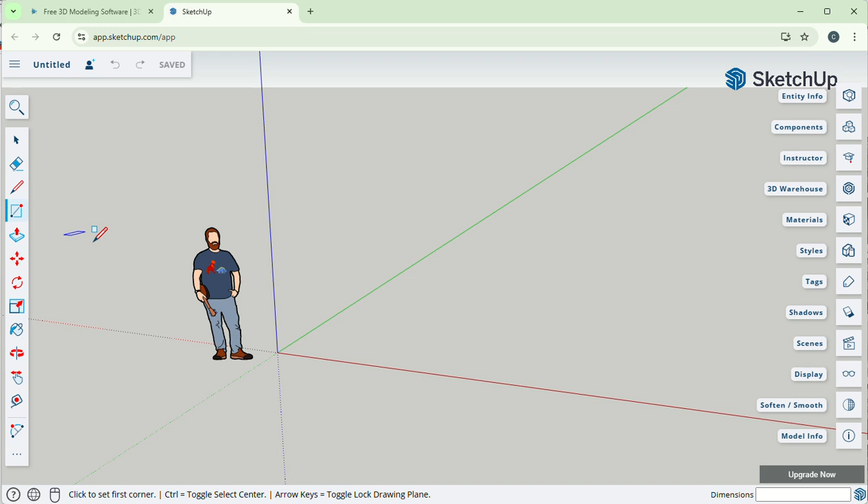First of all, I'm going to click this tool, which is rectangle. I'm going to where the axes meet, and I'm just clicking, click. My hands are now away from the laptop. I'm now going to the mouse pointer tool, the mouse keypad, and dragging it. And now I've just let go. And I'm going to click again to end the drawing.

So that is a basic rectangle, and it's on the floor, level with the man's feet. You can see I've still got the rectangle tool active, and now I'm going to click this, which is probably the most powerful of all the tools - push pull. This is what suddenly makes it become 3D.

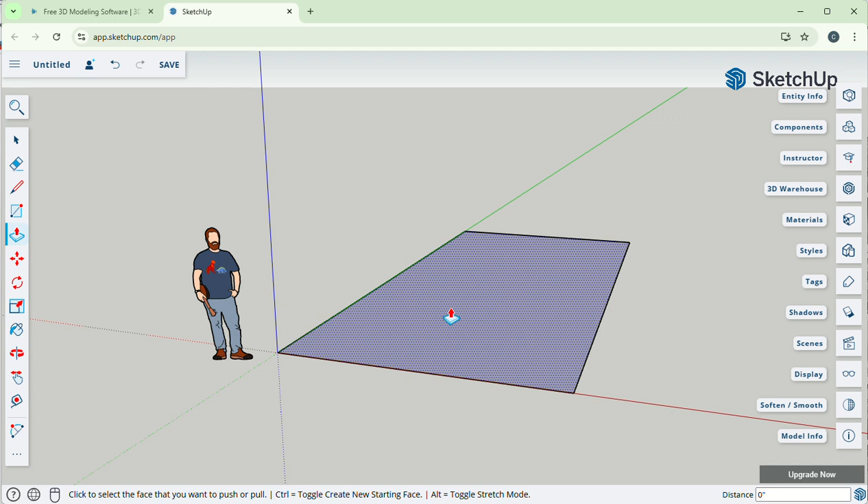So I'm hovering over the rectangle I just drew, and it's just one click - I'm not dragging, not holding the mouse button down. Now I'm moving the mouse pointer, and isn't that fantastic? And I'm clicking again when I've finished.

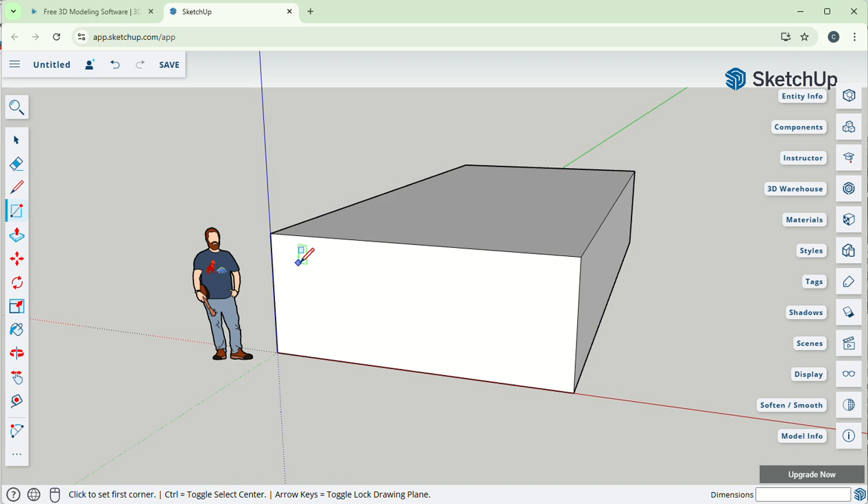Now you can draw another rectangle. Go and select the push pull, and I'm going to push it in a little bit. I'm going to do another rectangle, and push it in again. Click. Now I'm going to draw a line down the middle of what I'm already thinking of as the roof of this building that I've just constructed.

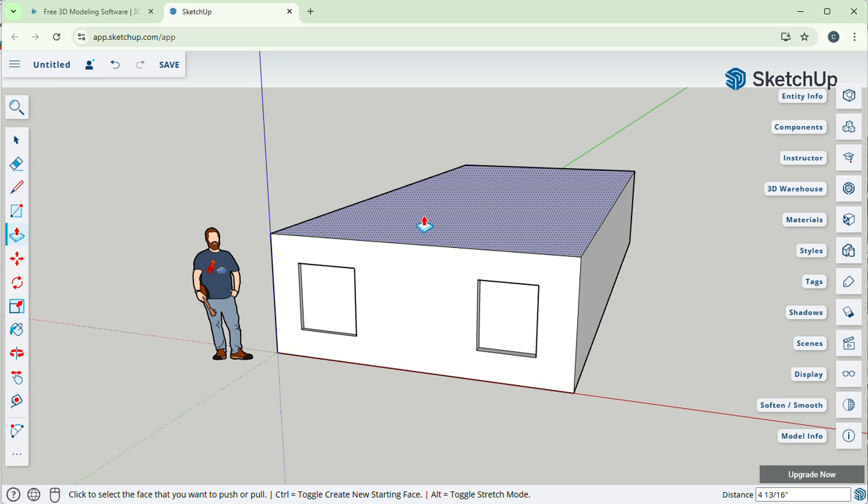Maybe you think I'm being a bit optimistic, but one very useful feature - can you see the dot showing I'm on the edge, and it stopped when I got to the midpoint. Now, can you see as I'm moving, the line is green, showing it's parallel with the green axis, which is what I want. I want it going along the same direction, parallel to - if I drag it off here it becomes black, but if I go it will snap to that, and it should show when I get to the other end, I'm at the midpoint there.

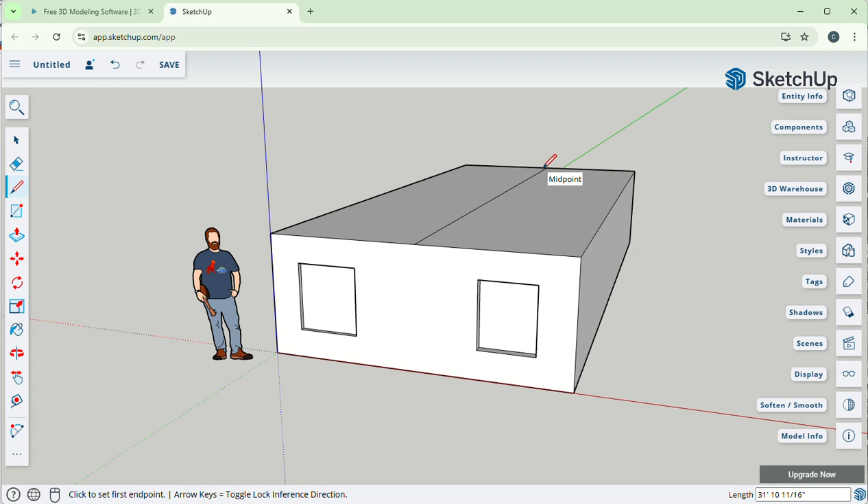Now, why on earth have I done that? You say, well, you can do little things. Select that and go up. But I don't want to do that actually.

I'm going to click the undo tool here. Is that going to undo it? Yes, it does. And what I'm going to do is select this move tool. So we've just got 3 tools we're using at the moment: rectangle, push pull, and move.

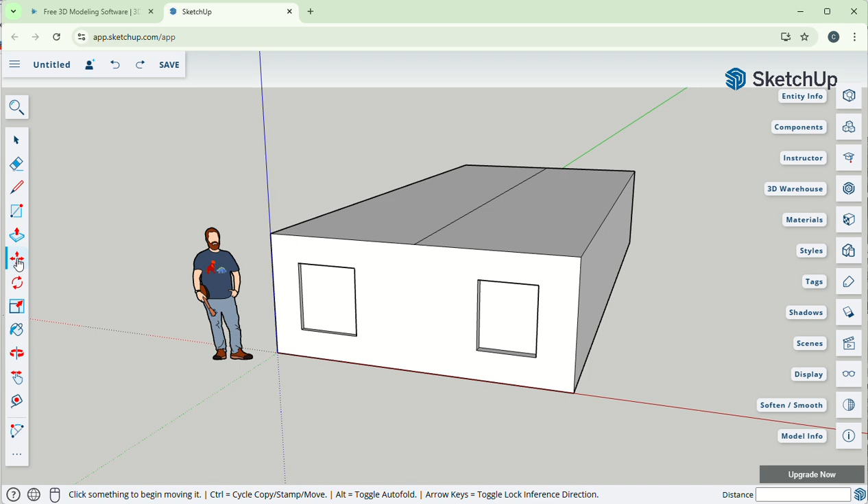Now I'm going to use the move tool, so I'm just using that, and now it's again click - you can see it's selected. I'm clicking to say that's the line I want to select, and now I'm moving it up. Can you see that it's parallel to the blue axis now? And I'm drawing a pitched roof.

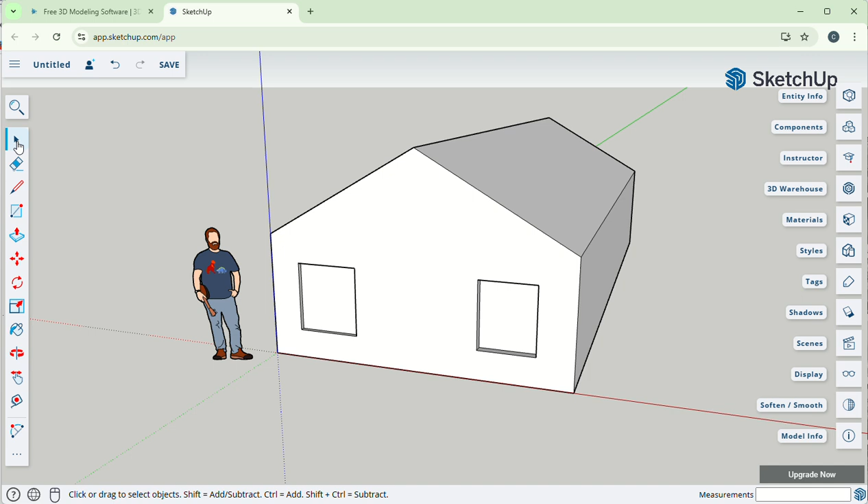And one thing I'm going to do is proudly - I clicked on the word untitled, and I'm going to save it in SketchUp server North America, which is hopefully where it will be next time I log in and come to look. I'm just going to call it Basic House, Basic House 1, and save. Saving seems to be a bit slow, but there it is, Basic House 1 saved.

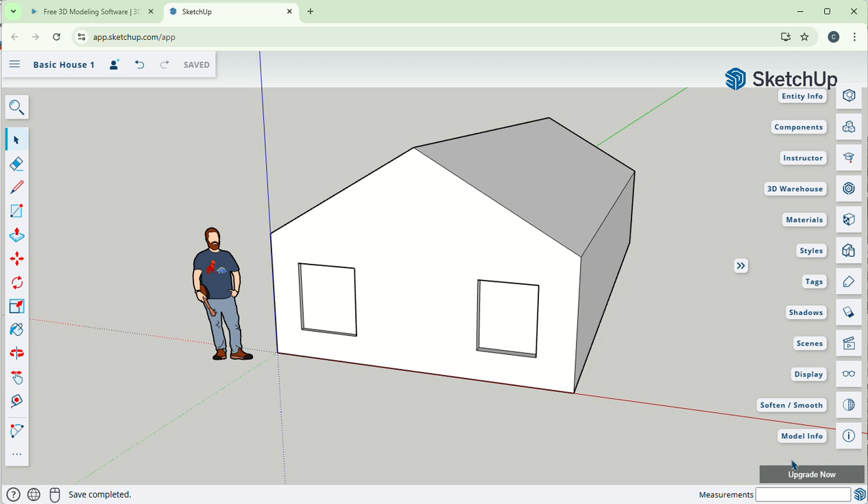So there we are. I can build on that next time, but have fun and enjoy using the product, experimenting with the other tools, which I will come back to in a future video.